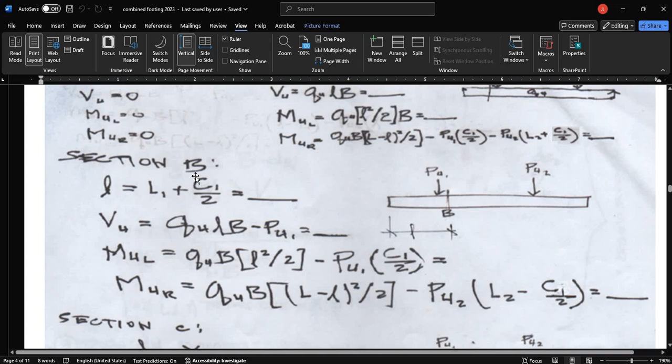Okay, ganon din dito sa section C. Kunin mo lang yung absolute maximum values ng MUL, MUR. Ganon din sa section B, maximum value, absolute value of MUL and MUR. Yun yung mga design moments.

And then, lastly, at section E naman, sa outer face ng column, that's section E. Ang tributary L natin ngayon, from this start edge is capital L minus L3. Bakit minus L3? Yung L3 na yan is the distance from this outer edge to the center. And then, i-add natin itong C3 all over 2.

Okay? And then, ang net shear ngayon dito sa edge, sa cutting at point E, is yung due to Q sub U, and then i-minus natin itong PU1 tsaka PU2. And then, for the moment here at left section, due to Q sub U, and then due to PU1 tsaka due to PU2, which is this. And then, dito sa moment at right, ang moment dyan is caused by the Q sub U alone, which is this.

Okay? And then, lastly, dito sa end, your tributary length now is equal to the overall length. So, obviously, ang shear force mo dito is 0. And then, dito tayo ngayon mag-take moment. Okay?

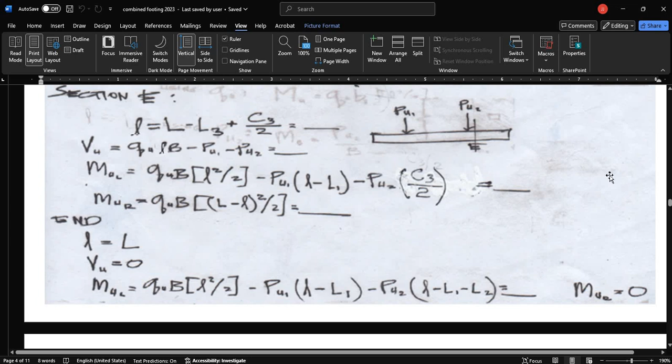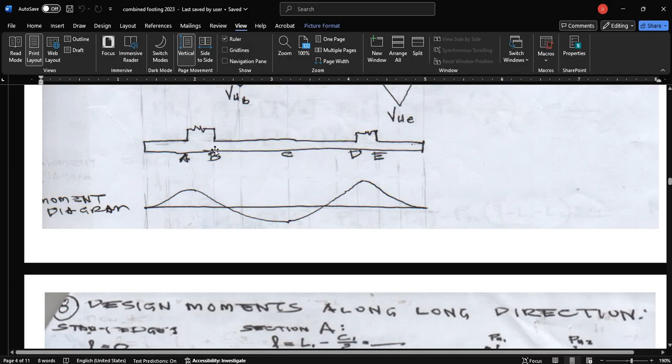Okay? And then, ang tributary length naman ni PU2 would be simply L3, okay, or small l, which is actually your capital L minus L1 minus L2. Ano to? Yan yung L sub 3. Okay? And then, obviously, yung moment at right is 0. Okay, so alam na natin ngayon yung mga design moments along long directions, that is at sections A, B, C, D and E.

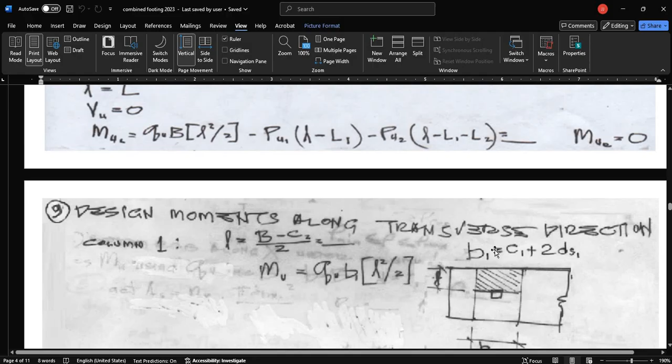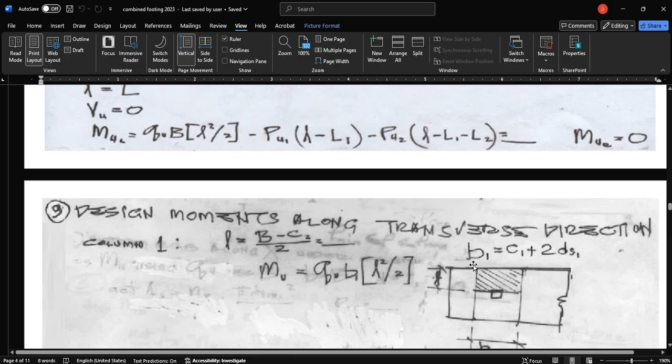Next, check is number 9, design moments along transverse direction. So, ang ko-consider natin na bakal ngayon is yung bakal parallel to B. Okay, yung paganyan naman ang direction. So dito, ang tributary area natin is this shaded area defined by distance B1 tsaka itong distance na yan.

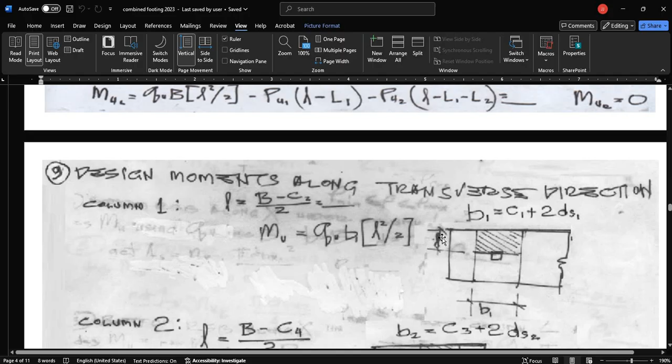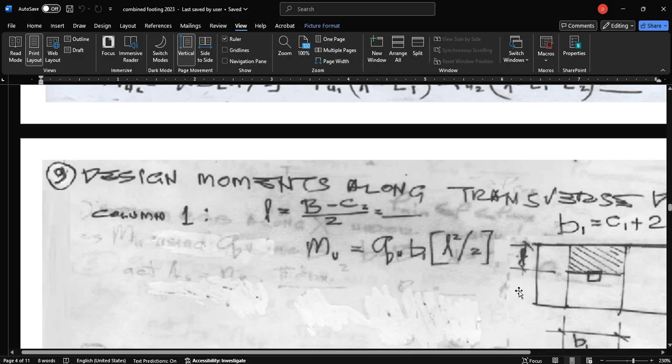Which is, let's say, this is distance L. Okay? Ayan. So, ang distance L, yung dimension na yan is equal to B all over 2 minus C2 all over 2, or the quantity B minus C2 all over 2. Tapos, ito namang dimension na B1, that is C1 plus twice of DS1. Take note na yung DS1, yan yung distance from the edge of column up to this edge. So, times 2 lang yan. Then, you add your C1.

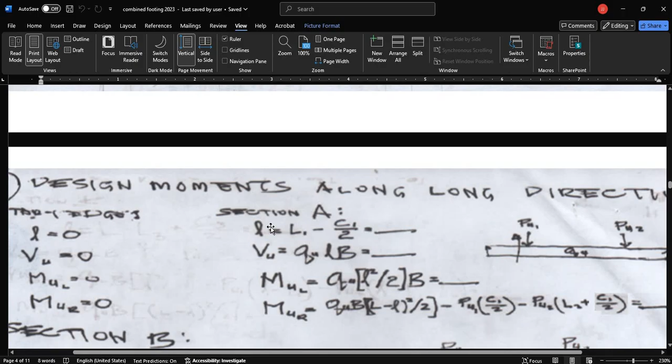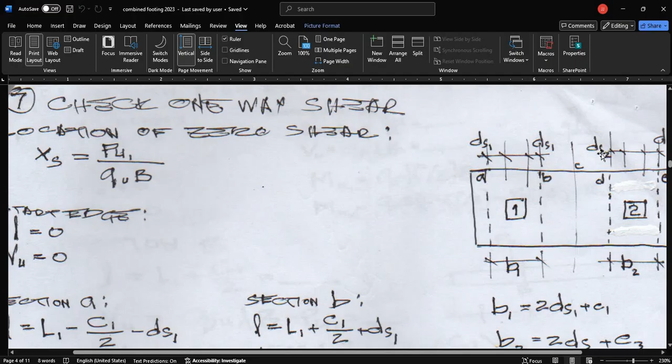Ang DS1 is equal to, galing yan dito sa shear. Ayan. Okay? And then, pagpunta natin ng column 2, ang gagamitin naman natin ay DS2.

So, going back, ang B1 ngayon is this. Tapos, para sa column 2 naman, same principle, pero ang gagamitin natin ngayon ay B2. Okay? Tapos, ang tributary length natin is B minus C4 divided by 2. Take note na yung C4 ay yung Y dimension nitong column 2.

And then, ang kanilang moment is dito sa column 1, QU times B1. Ito yung B1 times L. And then, ang lever arm nitong shaded part is L all over 2. So, ito yun.

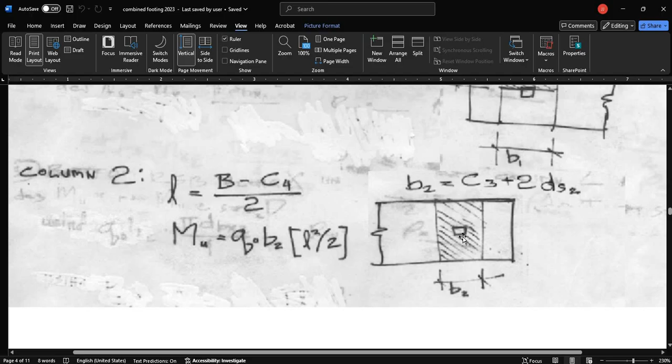And then, likewise, computein mo rin yung moment dito sa column 2. Okay? Ngayon, ang area mo dito is ganun din. Meron kang shaded area mo ay ito lang, no? So, ayan, inedit ko na. So, ito ngayon yung Q sub U, ito ngayon yung M sub U, QU times B2 times L square all over 2.

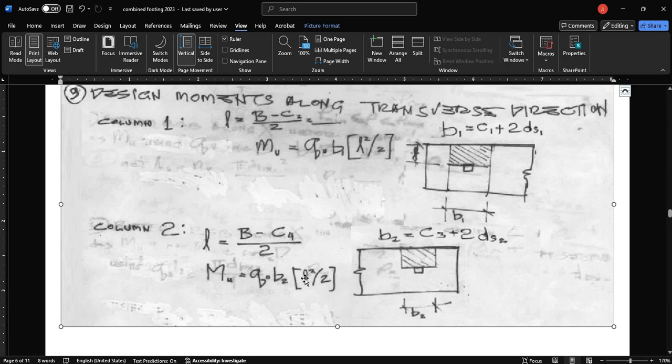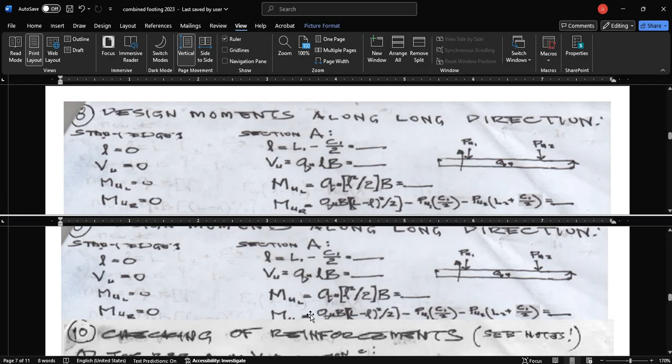Punta na tayo ngayon sa design moments along long direction, which is at check number 8. So, parang inulit lang natin yan. Okay, so yung MUL, ito yun. Ano? Tapos yung MUR is this one.

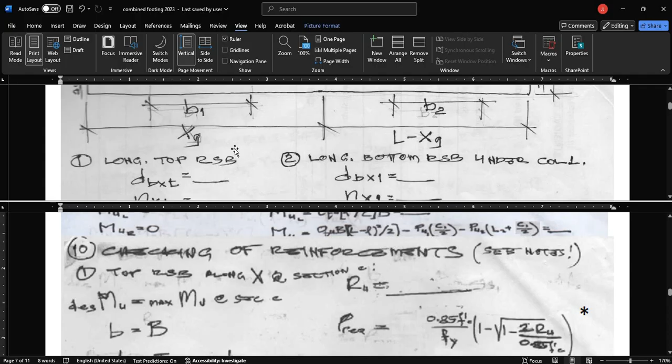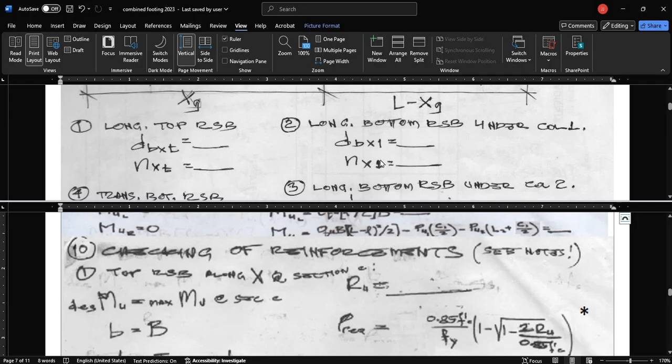And then, dito na tayo sa check number 10, which is checking of reinforcements. Checking siya dahil dito sa given, ano, kasama dyan yung mga DBXT, NXT for bar number 1 and then bar number 2, DBX1 tsaka NX1. Ngayon, etong bar number 1 na yan, ito yun.

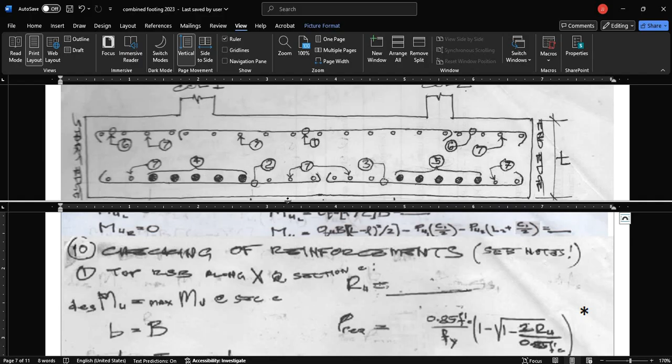Yan. Yung nasa ibabaw, that is parallel to X or parallel to the dimension L, okay, which is this top RSB along X at section C. Ngayon, ang section C na yan is yung point of zero shear or maximum moment. So, ang kukunin nating design moment dito is yung maximum moment at section C, okay, which is taken from dito sa check number 8.

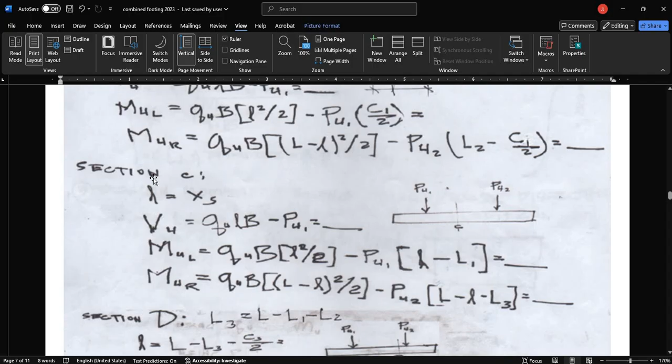Ito. Either of these two. Okay? And then, which is, take note na yung MUL, okay, parehas lang yan dito sa section C. Ito yung galing sa check number 8. Ano? Yan. Tapos yung MUR naman dito sa check number 8, dito sa check number 8.

Ito. Design moment at section C is maximum MU at section C. So, kunin mo lang yung maximum dito sa dalawa. And then, ang R sub U natin would be equal to M sub U divided by 0.9 BD squared.

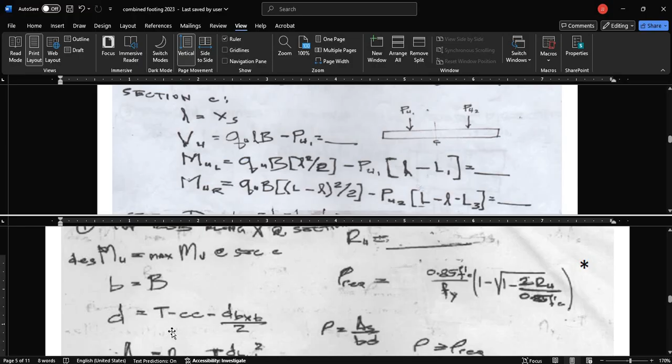And then, babalikan natin yung notes. Okay? And then, ang dimension small b, considering singly reinforced beam, is etong dimension capital B. Okay? Tapos, this time, ang effective depth ng singly reinforced beam is magsisimula sa baba. Okay, kasi ang ating figure ngayon, since ang bakal natin ay nasa taas.

Okay, etong bar number 1, ang effective depth natin ngayon ay simula dito sa baba. So that is capital T minus clear cover minus yung bar diameter nitong number 1 divided by 2, which is dBxt divided by 2. Okay, so yan ang ating effective depth D.

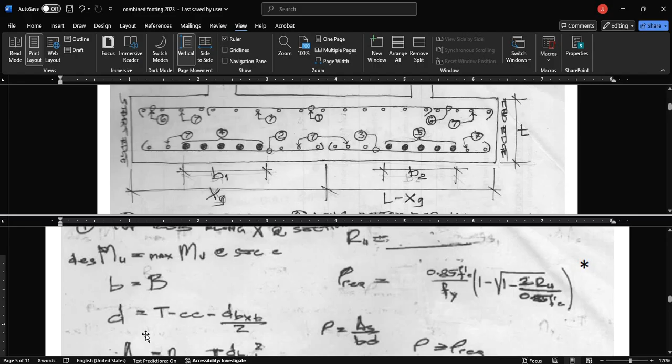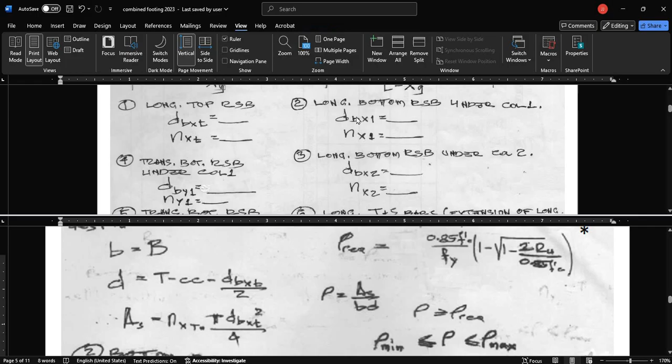And then, ang ating AS, okay, is eto, NXT multiplied by pi dBxt squared all over 4. So, meron na tayong rho required, meron tayong actual steel ratio. And then, balik tayo ngayon dito sa notes.

So, dito, if rho minimum is greater than your required rho, by the way, ito yung required rho, ano? Then, you have to recompute your rho required, which is the maximum of these two conditions. Okay?

And then, we will now compare your actual steel ratio to your rho required. Your actual steel ratio should be greater than your rho required, and then your actual steel ratio should be greater than or equal to rho minimum, and then your rho max should be greater than or equal to your actual rho. So, natapos na natin yung bar number 1.

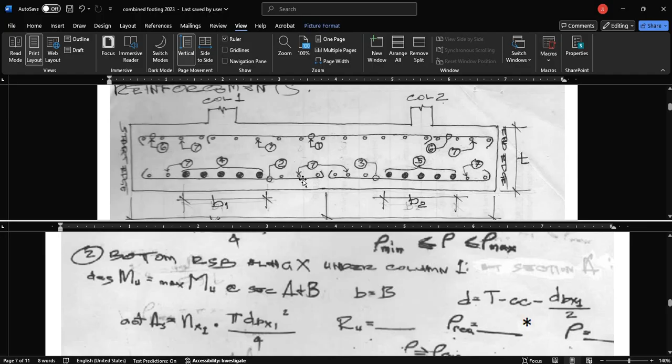Dito naman tayo ngayon sa bar number 2. So, ano yung bar number 2 na yan? It is your bottom RSB along X under column 1, which is yan, bar number 2, no? Yan yung longitudinal bars under column 1, yan, yung mahabang yan, defined by distance x, g. Okay, so dito na tayo ngayon sa bar number 2, bottom RSB along X under column 1.

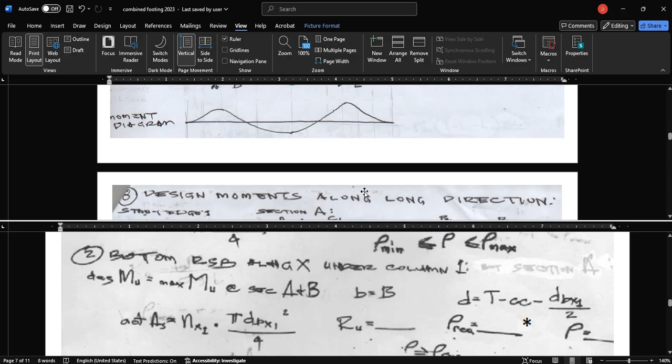Ang design MU natin dyan ay design MU at section A and B. Maximum MU at section A and B. So, check nga natin kung nasan yan. So, balik tayo dito sa design moments along long direction, and then punta tayo sa section A and B.

So, ang section A ngayon is meron tayong dalawang MU, yung at L tsaka R. So, kunin mo yung maximum dyan, absolute value. Tapos punta tayo dito kay section B.

Kunin mo ulit yung maximum value dito sa dalawa. Ngayon, pag-comparein mo kung ano yung maximum absolute values nitong apat na moments. Yan, ngayon yung magiging design moment mo dito sa bakal sa ilalim ng column 1.

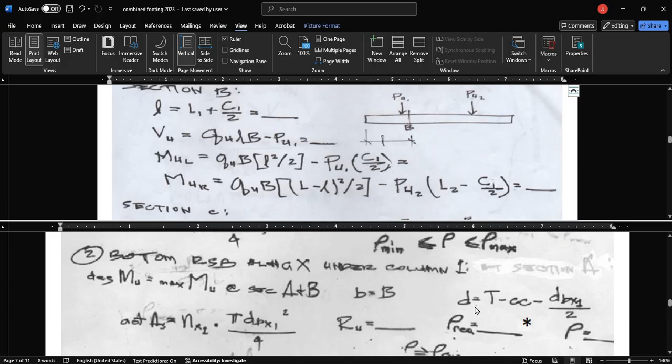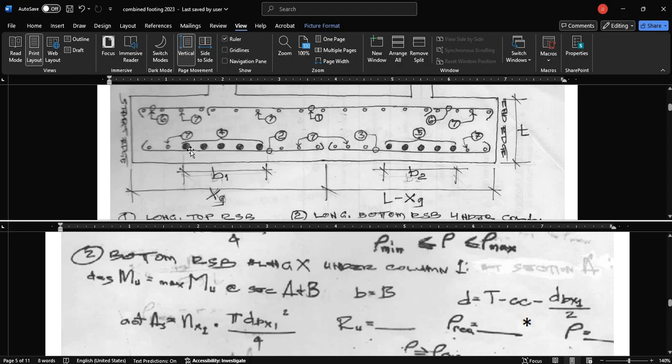Ngayon, going to singly reinforced beam, yung beam width would be capital B. Tapos ang ating effective depth, ganito naman ang effective depth D, manggagaling sa taas since ang bakal natin ay itong nasa ilalim. So ang effective depth D would be footing thickness T minus clear cover minus diameter of bar X1. Ngayon yung diameter of bar X1, this is bar number 2.

Yan, okay? See? So from there makakompute na natin si actual AS, NX1 times d, pi dB X1 square all over 4. And then ang ating RU is yung design MU divided by 0.9 B times D squared. So again, you compute then your rho required, and you compare to rho max and rho minimum.

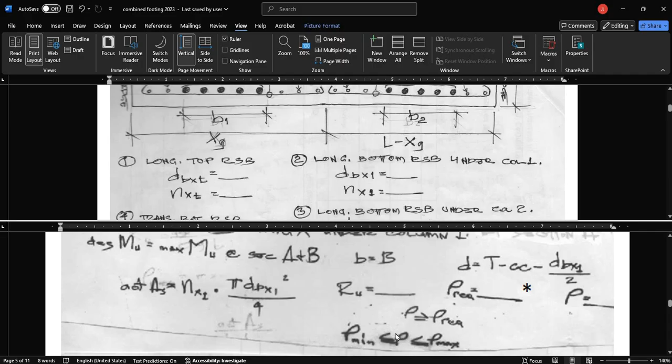So dito naman ngayon sa bar number 3, ito ngayon yung nasa longitudinal bars under column 2. So ito ngayon yung bar number 3. Dependent, ang location ngayon niyan ay itong L minus XG.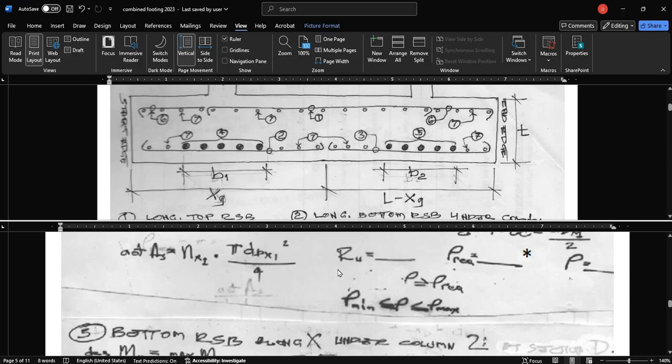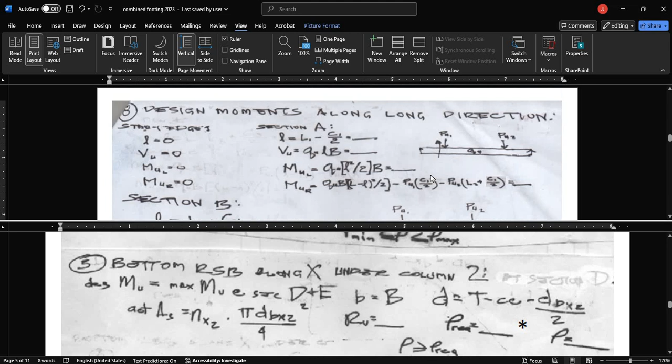Okay, this time ang kukunin mong design moment natin dito ay yung maximum moment at sections D and E. Dito natin yan kukunin. Okay? Dyan sa number 8, ayan. Kunin natin yung absolute maximum dito sa D. Yan yung dalawang yan, tsaka sa E.

Ito, MUL. Yan ang ating design moment. Okay?

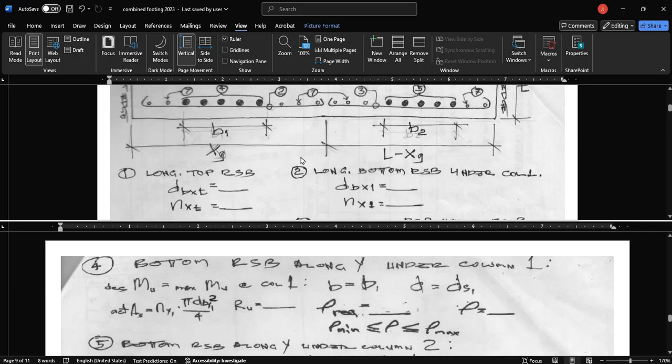Next is yung transverse bars naman, which is bar number 4. Kaya ko sinabing transverse bars, it is perpendicular to the longitudinal axis. Yan, so that is bar number 4.

Ito, okay? Yan, yung black bars na yan sa ilalim ng column 1. So transverse bars yan. Same with bar number 5, transverse bars pa rin yan.

Okay, so ito, bar number 4, ang design moment niya ay maximum MU at column 1. Saan natin siya kukunin? Dito sa check number 9, design moments along transverse direction. So ang design moment natin dito sa bar number 4 ay simple lang.

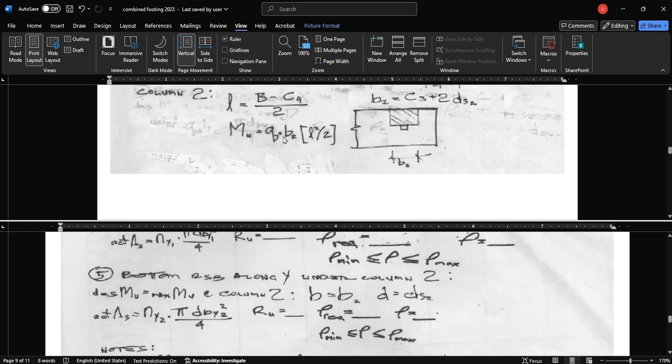Ito, okay? Sa bar number 5 naman, ang design moment natin ay under column 2. Yan, yan lang, maximum moment at column 2. Then let's go back here.

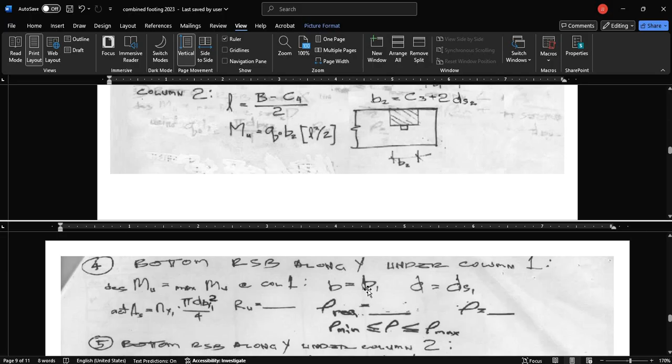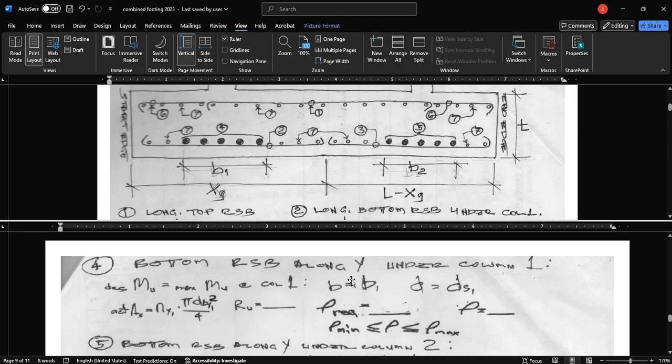Again, gagamit tayo ng singly reinforced beam. Ang width ng singly reinforced beam natin ngayon ay dimension B1, which is ito. Yan, yung B1. But how do you compute for B1? Yan ang tanong ngayon. Tapos ang effective depth D naman is equal to your DS1.

Yung B1 na yan ay magdedepend yan dito sa one-way shear. Ito, yun, see? So ang B1 is equal to twice of DS1 plus C1. And then etong DS1, magdedepend yan dito sa, again, sa shear, punching shear naman, which is eto, DS1.

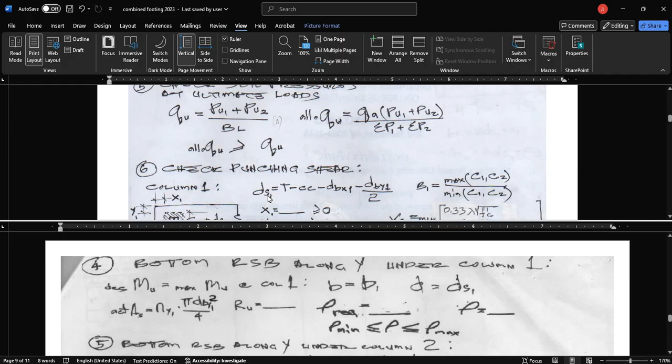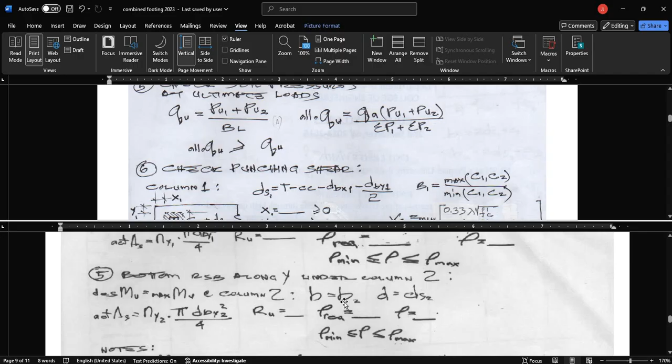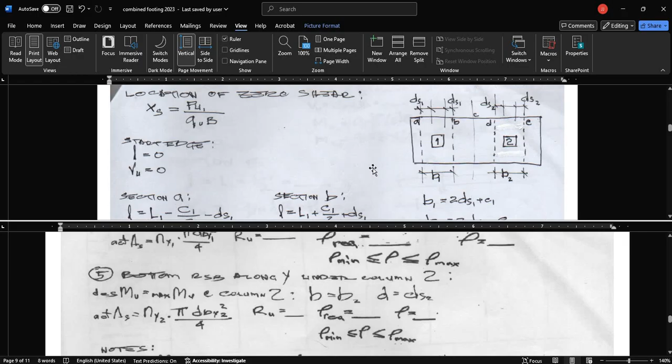Okay, likewise, ganon din sa bottom rebars along Y under column 2. Ang ko-consider natin ngayon dito ay B2, which is eto naman, one-way shear. Your B2 here is equal to 2DS2 plus C3. And then ang D naman ay manggagaling sa DS2, which is equal to eto. Okay, yan ang DS2.

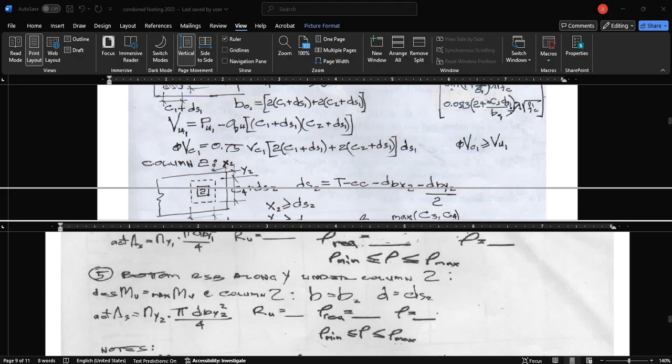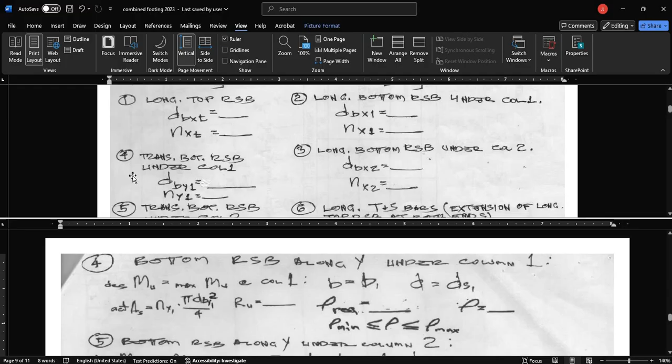So going back here, meron na tayong actual AS. Yan yung AS ng bar number 4, ito, which is equal to NY1 times pi dBy1 squared divided by 4.

Okay, tapos since alam na natin si B tsaka si D, makakompute na natin si RU, wherein RU is equal to design MU divided by 0.9 B times D squared. Okay? And then compute natin si rho required based on your RU, at yung actual steel ratio rho, which is AS all over BD. Then you compare that with rho min and rho max.

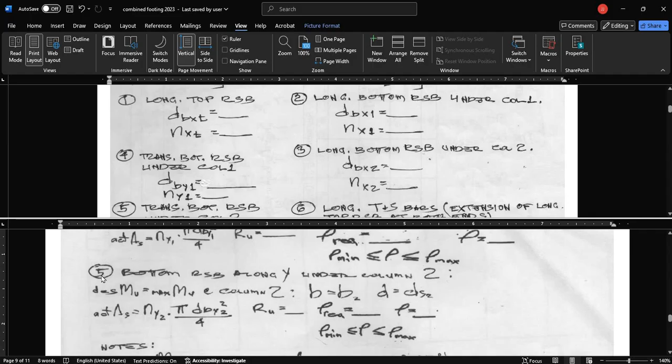Okay, so same procedure goes to bar number 5, which is ito, transverse bottom rebars under column 2. So ito rin yung mga notes niya. Okay? RU is equal to design MU divided by 0.9 BD squared. Then actual steel ratio is actual AS divided by BD. And then rho required is this.